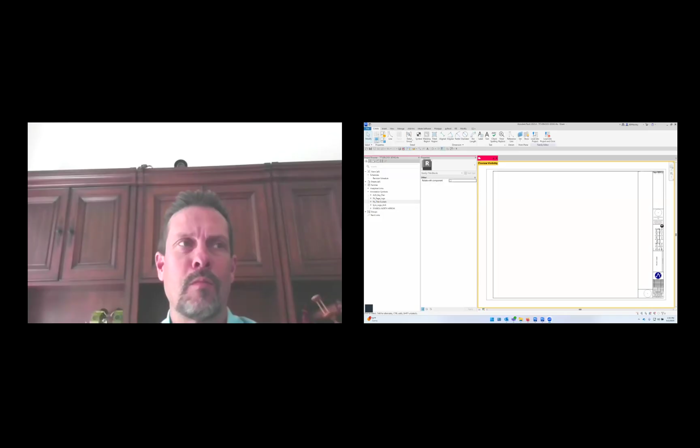Oh, can't see the layout, seeing two Brians. What? See, I was playing with the layout earlier. So for those of you watching this recording, just fast forward for a little bit. There's a new button in here called layout. Was it before I did? Oh, it was before I started it though. Did I screw it up? Now we're seeing your screen and you about the same size, but you're also at the top. I'm also the top. Dang it. Okay, hold on. There was a button called layout. I'm like, what does this do? And I obviously screwed it all up.

That's my view. Attendees standard. Is that better, everyone? Still big you and two little you. Side by side speaker. How about this one? Maybe you have to stop sharing and reshare. Oh, that's a good thought. Have you tried turning it off and on again? Advanced sharing options. No, that's not what it was. Okay, I'll stop sharing. I'll just edit it out. I probably won't edit it out. Let's be serious. No, I want to stop share, not continue to share. It did keep you. Okay, now it's just you. Well, I don't have the layout anymore. The layout button went away when I started the broadcast.

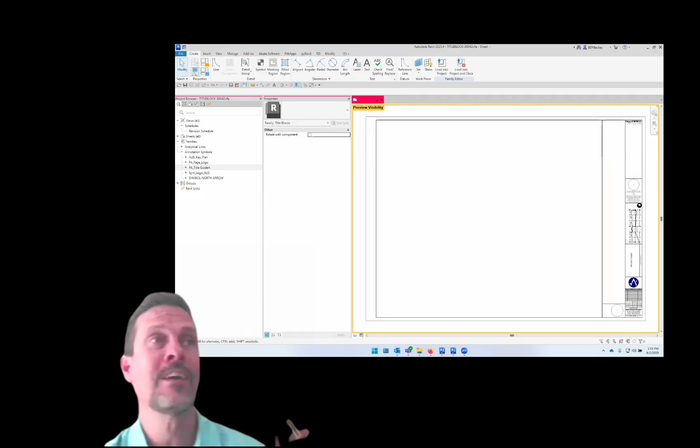Oh, found it. Sorry, the button moved. Content only. Is this better? Oh, there you go. Okay, so for those of you who ever get into your own Zoom webinar, do not ever hit the layout button. Now that I found the button, I could just be a floating head here or this one. Cool. I guess it's that one we wanted. So if you do find that button, switch it back to content only. So there we go.

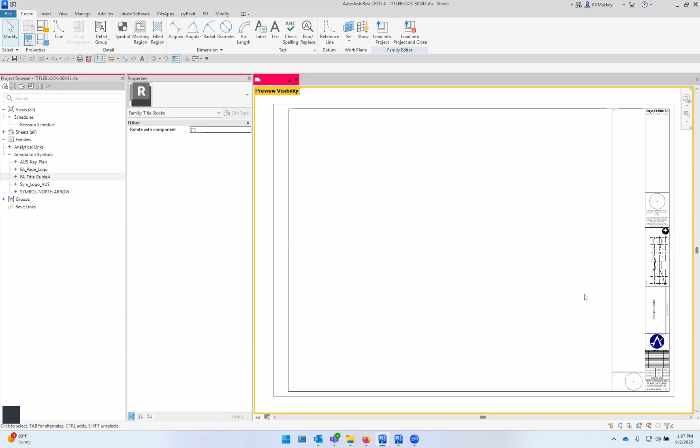And I believe one of the ways you guys do it at Parallax, Melissa, is similar to the way I do it here. For me, I open the title block, and in my title block family, I have a nested generic annotation family. So I don't care how accurate this is. I get some clients like, no, that is not an accurate depiction. This particular project is an airport. That doesn't show the planes and the terminals and all that stuff. If you want that, this might not be the way to go for you.

But for me, I nest in a generic annotation family. I have this set up in my template as well. So when I start a project, I have a generic annotation family within that project called the key plan. Within this key plan, I just draw some very basic shapes to match the building. I create an object style for all of those shapes, called like the building outline.

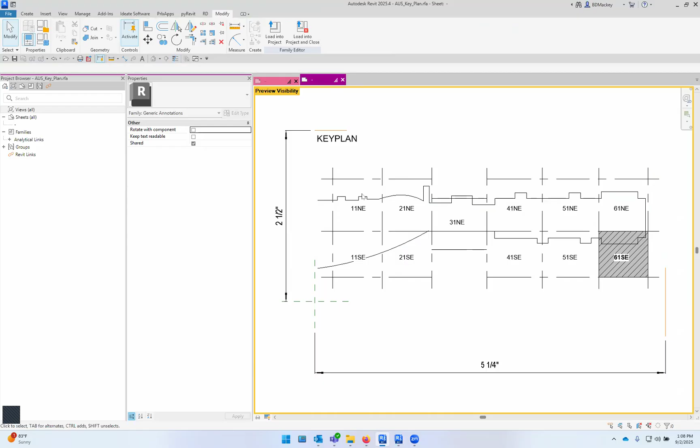Usually because most of my clients are very concerned about having different line weights on everything. If you don't care because it's a key plan, you can not worry about that. But once I draw the building outline, I take all of those lines and put a visibility parameter to the building footprint. I do the same thing for the match lines. I draw a match line and put a visibility parameter for all of the match lines.

Then what I do is put filled regions, which I will have one over here. Each filled region gets a visibility property for each one of those areas. So if I come down here and turn off my preview visibility, you're going to see I've got filled regions in every single one of these.

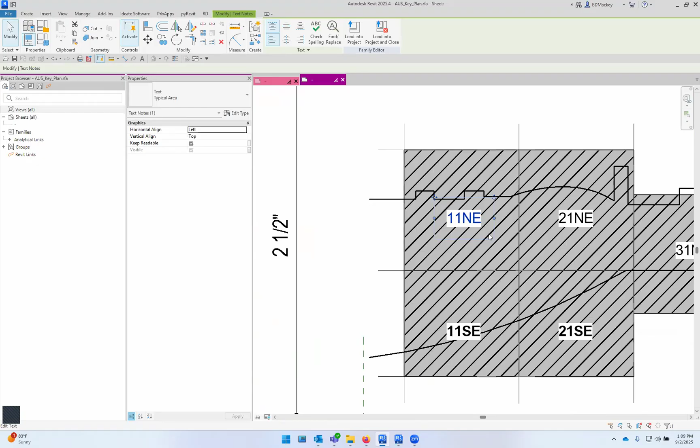The one thing this has that I've never done before, this particular client asked for it, they actually have one piece of text and then another piece of text in bold right there. The reason is when they turn on the preview visibility, they want the word of the key plan area to be in bold and the other ones not to be in bold. So I have the one piece of text, and then the other piece of text right over the top of it that's in bold.

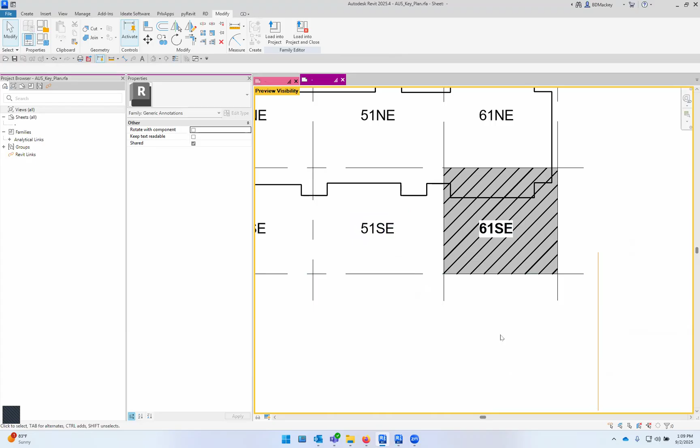So if I go into my family types, you can see I got the visibility for each one of the areas. And down here, I had another one just to turn off the bold text. So this turns off only the filled region, but when this is turned off and the match lines are turned off, the bold text goes away as well. So that's how I set this one up, so the text would toggle on and off.

Then, of course, inside of here, I create a type for each one of those key plans. So this one's called Area 11 Northeast. If I hit apply, we'll see that that one goes away, and we'll do 61 Northeast. Hit apply, you'll see that that one will now turn on.

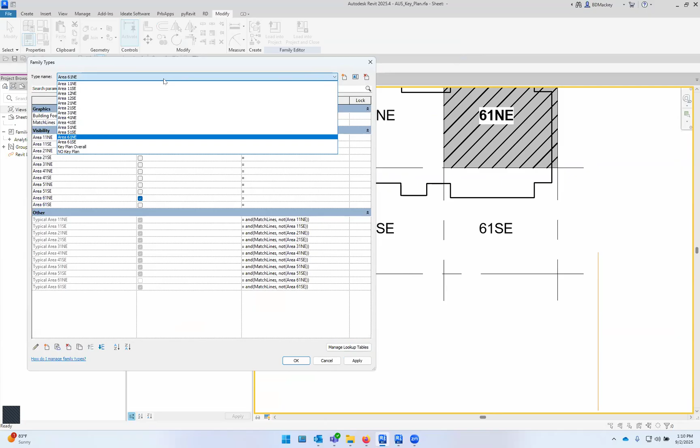So I create all those types. I also create a type called key plan overall, where all of the filled regions are just turned off, and I see the word key plan and all of the little pieces of text. The last one that I create, I call no key plan. So I hit the apply button, and all the things are toggled off.

And this is the reason why I do building footprint and match lines on a line: I like a type called no key plan. The reason for that is, when I get into my title blocks, I don't control this via the title block, right? If I go into my title block family, you're not going to see those 500 different toggles mapped through here. What you're going to see is a family type parameter, right?

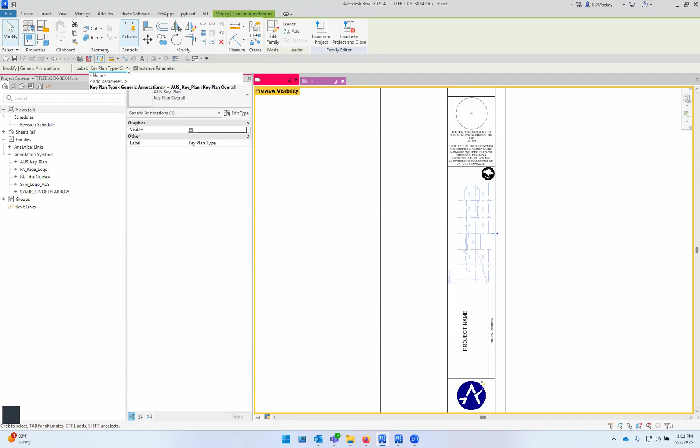So I selected the generic annotation symbol after I located it. I came up here and said I want to add a parameter, and I created what Revit determines as a family type parameter for that nested type family. The big thing is, back here in the original family, I have set it shared. And this is the reason why I like doing this.

So with this being shared, when I load this into the project, I'm going to create a new project, because opening the one that's there is probably going to take way too long. But when I load this title block into that project, it's also going to load this key plan family. So I'm going to load this into my blank project, put the title block in here, and have this beautiful new title block.

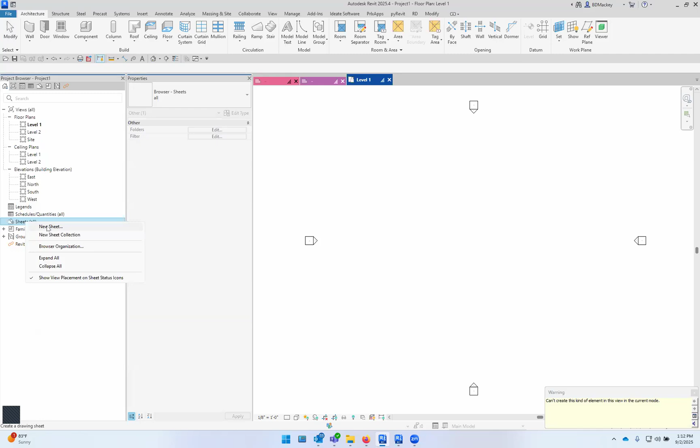If I create a new sheet, I now have the title block that we wanted to be using here. We'll just say the no guides, right? And now with the title block, I can choose which key plan I want to be seeing. Which one am I looking for? So it's not toggling and having 500 different title blocks, one for each key plan. It's literally just a nested generic annotation family for this particular thing.

Where it's really nice on this particular project is there are 5 different buildings we're doing. There's an area over here, and there's a whole new building way over here on the actual job site. So what's nice is, in our families, under our generic annotations, it's just going to be down here. What do I call this? Usually I call it sym. I don't remember what I called it in this project.

They had a requirement. I was going to say it starts with an S, but maybe not. Maybe it starts with a T. We just tab selected to figure it out. AUS key plan. Oh, that's right, it's for the actual airport, right? So that family is there.

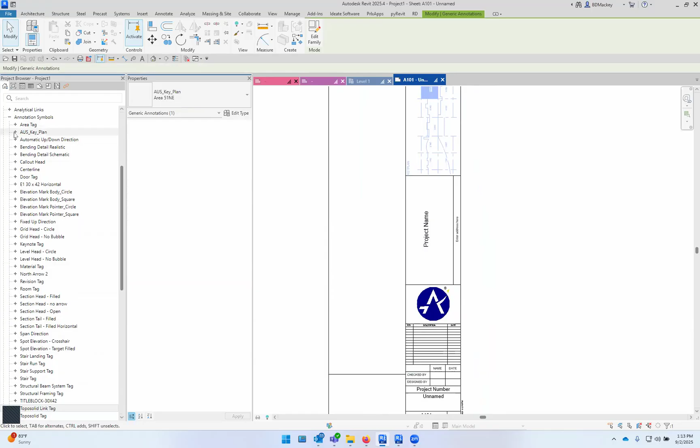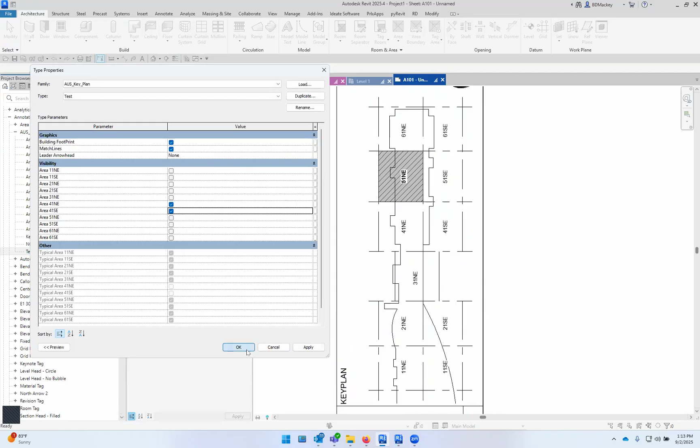So if for some reason I need to come in here, and we're doing one view that's going to have 41 Northeast and Southeast, I need a new type. I don't have to edit the title block or go through there and do anything. All I have to do is, under the key plan, duplicate this and call it my test. Then in that test key plan, I can just toggle on the multiple areas I want to see. The title block wasn't edited in any way, shape, or form, and I now have my new test key plan.

So in this building's case, the other project that's using a different key plan because it's a different building, all they have to do is come up here, right click, reload, browse to their key plan, and it's going to be a part of it. So if I come down here to mine, I'm going to go into my annotations, not my adaptive components, and into title blocks. I probably have a TB key plan in here. Nope, it's probably under symbols.

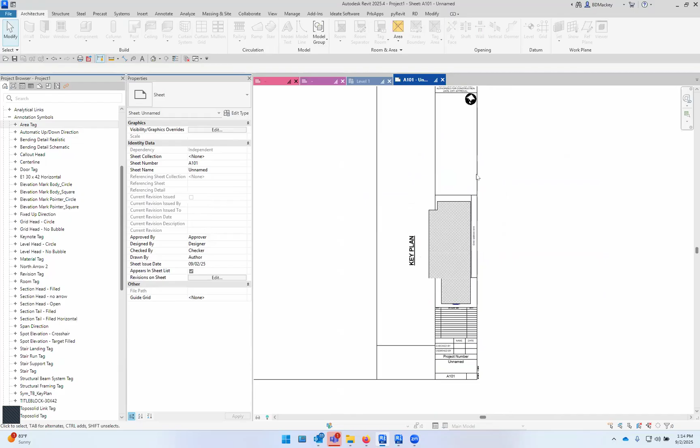It'd be nice if I actually knew my own content naming, right? So here is my key plan. So for the other building, all I have to do is reload it. And now there's my key plan. Obviously, it had a different insertion point. You would make sure it's the same. But now when I grab this title block family, I have my key plans that I had inside of here.

So I can go grab the area D, the area A, the area B. All right, so this is what's really cool. And again, when you do your project and you save your new project out, you can go create a key plan for that particular project. You never have to edit the title block. All you have to do is go reload that family to be the new one. And hopefully they have the same insertion point, unlike these two.

Okay, I think I need to do not disturb. Okay. You need to hide your Teams. Just do not disturb. Because even though it says I'm in a meeting and it shouldn't be showing that stuff, Teams doesn't understand. So if you guys didn't know that, if you right click on Teams, you can say do not disturb. I actually moved both of these to the top because those are the two I use most often. You can pin those. So see, not only are we teaching you how to screw up Zoom, we're teaching you how to unscrew up Teams.

Perfect. Well, back to your key plan, we have two questions. The second one is just a confirmation, making sure that you were talking about sharing the family. And what does it say? So it says, confirming I heard correctly, you have to have the shared box checked for a nested family. No, you don't have to have shared checked for all of those different scenarios. The only reason you have to have shared checked is if you want that to get loaded into the project, and then you can manipulate the one in the project without having to edit the title block.

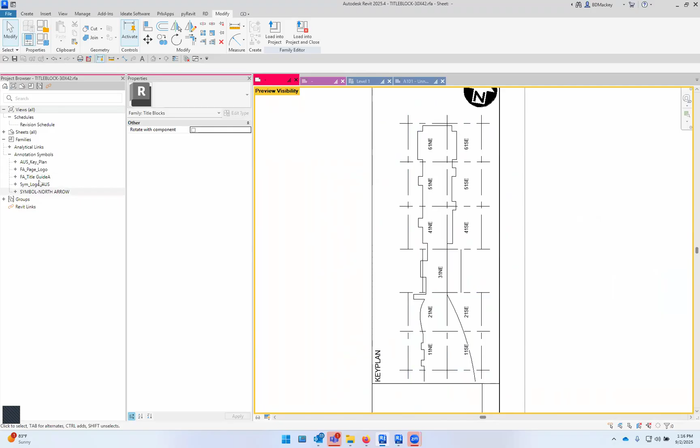Even though that's part of the title block, I can tab select this. I can see the properties of this. I just can't really move it, do anything independent. If it's also a regular type family, I could choose to tag that independently or schedule that independently. So if I really wanted to go do a generic annotation, what are those called? Note blocks, I think they're called in Revit. If I did a note block schedule, then I could actually see I have a key plan schedule, right? So I have this key plan family loaded inside of here.

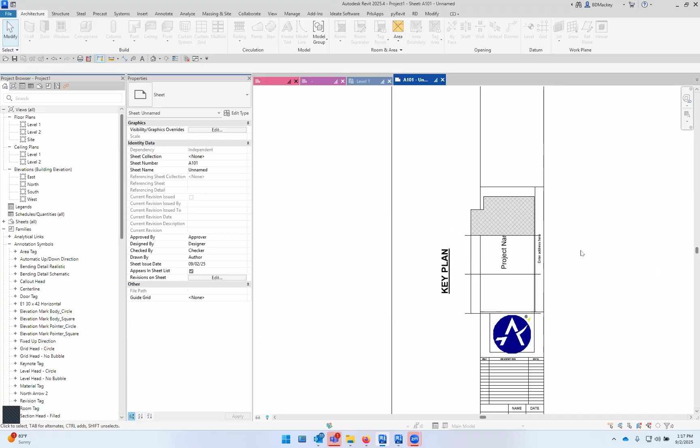So that's what the shared checkbox gives you. It gives you the capability for scheduling, for tagging, and for manipulating it without having to go into the nest. So that's what the little shared checkbox gives you. So hopefully that answers that question.

And I saw Simon had the comment of he uses area plans to generate his key plans. And that's fine. If you wanted to use a real view, you absolutely can. The only downside is if I need to put that key plan on 300 sheets, then I'm duplicating with dependent that view to put it on multiple sheets. I use this on almost all of my projects, but a lot of my projects, people are like, cool, this is the same area, but I've got level 1 through 10. So that'd be duplicating it 10 times.

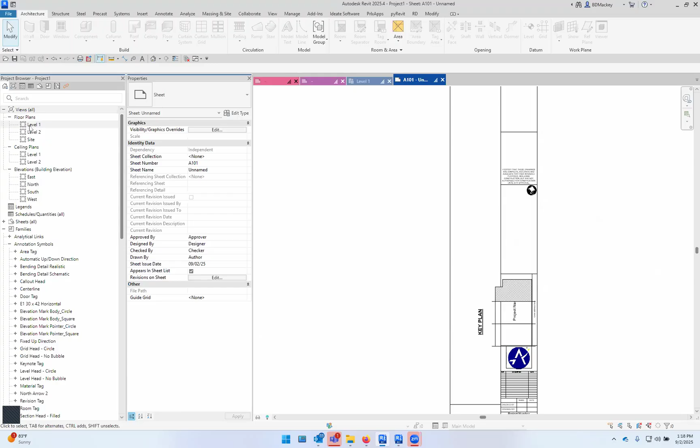Oh, I also got to do this on the reflected ceiling plan. So there's another 10 things. Oh, I also have finish plans and blah, blah, blah. So if you start doing this, I had one client do that. I literally got underneath the view they were doing, and there was like 350 dependent views of that one floor plan because they needed to drag it and drop it and put it on each sheet.

Also, prior to Revit 26, without having an add-in utility, there's no way to say you're actually getting that into the right location without building something into that view like a reference plane so you could move it based upon that reference plane. So I'm not saying the way I said to do it was the perfect way. I like the simplicity, and I'm going to undo this because it's driving me crazy. That's not in the right location. I just like the simplicity of doing it this way.

I also think too many people think the key plans need to be massively detailed like that. No one is looking at this billionth scale view of your building to get data from it. This is just representing to people, hey, we're roughly in the vicinity of this area. So I know some clients are like, no, no, no, I want to see the doors, the grids. You want to see all of that stuff. This is not the way to do it.

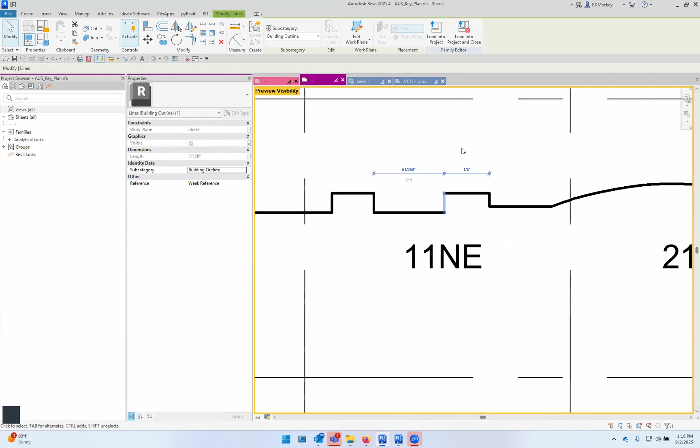Because again, if I go back to that family, you're in a generic annotation family, right? And the length of this line is 1/8 of an inch. I'm getting into problems where I might be less than a 32nd of an inch on certain portions of this building. I might just leave those parts out. Like this might have had some sort of angle in here. Don't care. If that line needs to be less than a 32nd, again, this is a key plan.

I think of the old hand drafting days where people drew a rectangle, called it the building, and then shaded over that rectangle. It didn't ever mimic anything to do with the building. So, like I said, if you want to do that, absolutely. But Simon, again, depending on the size of projects you're in, you might be duplicating that area plan 10 times, not a big deal. Over 300, I think I'd rather come up with a different way.

And I've also had clients who are like, oh, well, we like to do them as legends. So they go back in and do it as a legend. And I'm kind of like, well, a legend is very similar to a generic annotation. It's a scalable object anyway. So if you're going to spend all that work in a legend, then you've got to toggle visibilities on and off, so you've got to have a legend for each one of the different areas. To me, a little generic annotation family is more easily controllable because with a legend, you can't add parameters to the filled region, so you have a different legend for each one of those. That's what I got.

You guys do something similar, correct, Melissa? Or have you changed your game since a couple years ago? Yeah. No, we have a generic annotation nested into the title block, and then we have an app, so you can basically just hit go, and it goes through and reads the name of the sheet, finds the building and the area, and then makes sure that the key plan is set to the correct one.

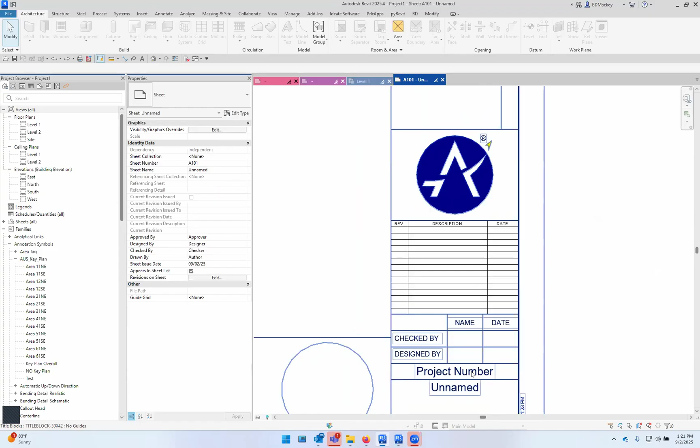Yeah, and I have a client who's using Dynamo to do the same thing. So the sheet name will say area 51 Northeast or whatever, and then it automatically says, hey, take the name of the sheet and match this property for that title block to that area 51 Northeast or whatever it is. So yes, they have a Dynamo script that will go through and do that as well. I don't think anybody in the office knows they have that script, so I'm sure everybody's manually doing it. That's actually fair.

We still only have one question. We have a follow-up comment to this, but then we only have one question. So I want to make sure you guys are still typing some questions in there as we answer the follow-up. Yes. So the follow-up is about filled regions. It says, I know they made some changes with the filled regions in families in 25, maybe.

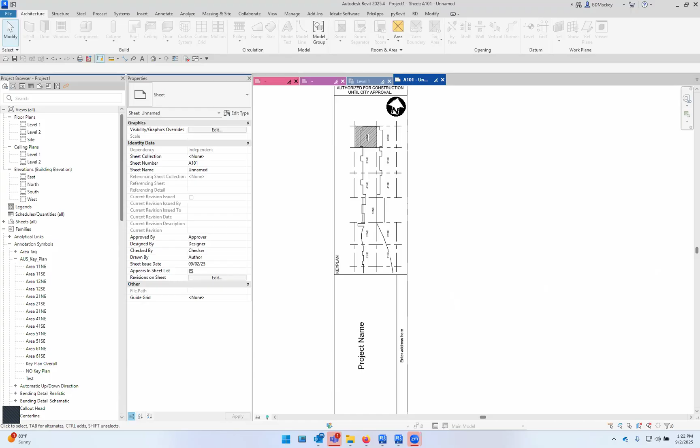We had the issue before with key plans that the lines didn't go over the filled regions, so the area boundary line. So their solution was to offset the filled region from that line so that you could see the line. Is that resolved for this particular case of lines and filled regions? Oh, it looks like maybe it is from what you're doing.

Yes and no. It always has been a display order issue, and this drives me crazy in generic annotation families. And I forget what it is, and it's really stupid because generic annotation families are different than detail components, and we don't get the display order bring to front, move to back that we get with detail components in a 3D family.

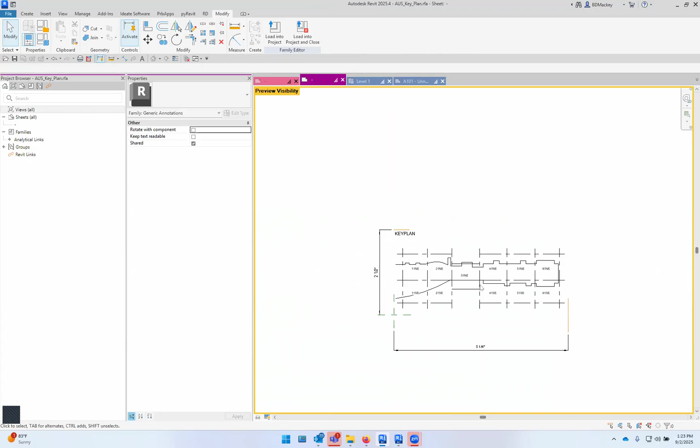Oftentimes I'll go through and do this and load it into a project and I'm like, oh great, this halftone line is over the top of that line. So I'm going to go through and change this to be one of the areas, right? And I've had clients come in and be like, oh yeah, so then technically if I changed the object style for match lines, it might be bouncing around.

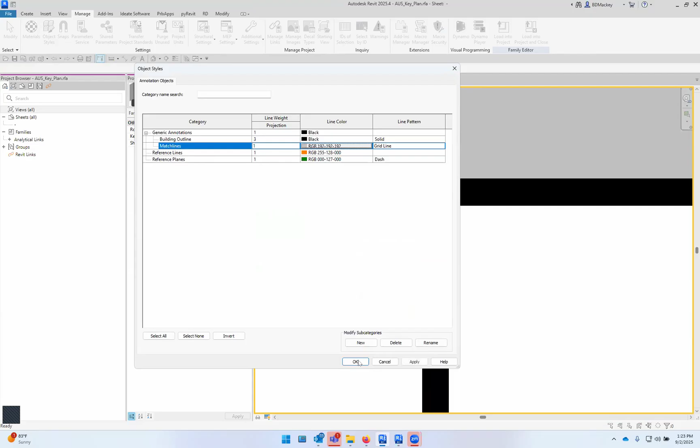And it's really stupid because if I came in here and I'm just gonna make this gray. If I did this, and I've had this happen before, now the gray line is on top of the black line. So now you get this black dash line here. Oftentimes that's how it displays in the family. You load it into the project, it doesn't display that way. And you're like, what the heck?

So you take those lines and I just do select all instances in this view. I cut them to the clipboard. I then do paste aligned to same place. It remembers the visibility and everything else that was associated to those. Then I load that back into the project, like, nope, that's not what the problem was. So then I select all instances of the filled regions, cut to the clipboard, paste.

So it's playing with that display order because in the Revit world, it's whatever was drawn either first or last, not sure, because it's different for different family types. And I start going through and doing that.

Yeah, thank you, Michael. I knew I talked about this before. Michael just said in the chat that I have a whole paper on this. I'll have to see if I can find that paper about display order in the families because it drove me crazy. And I swear over the years it's even changed sometimes. I don't even claim to know. I just know there is an issue.

It'll be the same thing if this text had a masking region. I've had the same thing where, why isn't this masking? I can see the text through the filled region. So again, it's a lot of select all instances, copy or cut, paste, and you've got to play cutting and pasting these things to get the right display order. In this simple family with no constraints, it works well. If things had constraints, you've got to reconstrain those, and that's where it becomes a massive pain.

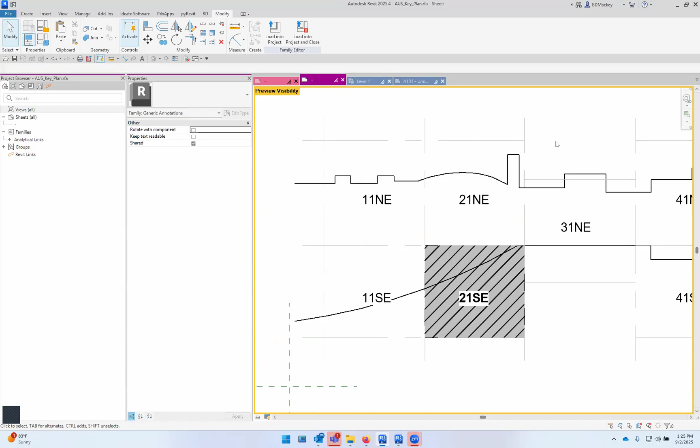But no, I don't know, Caitlin, if anything has changed in these versions, or I just keep getting lucky, or I just keep getting lazy and say, screw it, I'm going to make them all the same line weight, then I don't have to worry about it. Very well could be that too.

And I think there's still an issue, as you had said, that if I grab that filled region, if these were invisible lines, I have the problem with the invisible lines almost always covering over the top of them. Doesn't look like it's happening right now, but let's throw this into the title block and see. Let me change this to be one of the areas. So it doesn't look like the invisible line is going over the top.

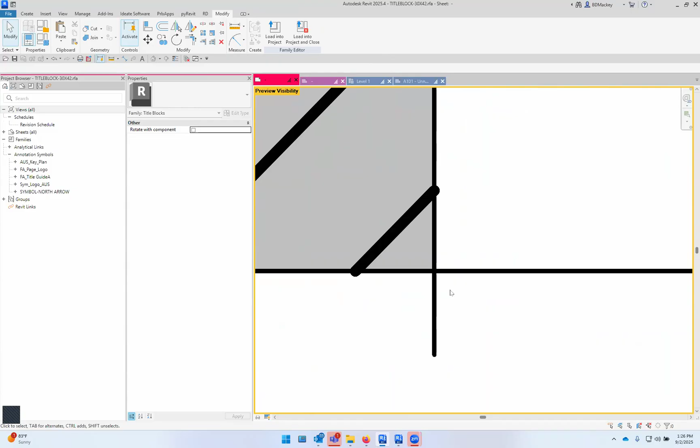Yeah, and Michael's saying, yeah, this did change a while back, because I had families that were working, and all of a sudden during one upgrade they started changing. It's like, oh, so well. Yeah, that's what my topic was. It looks like everybody's... I don't think there's anything else on there.

Okay. All right, close some things down before I break them. Boy, Melissa's looking for the next question.

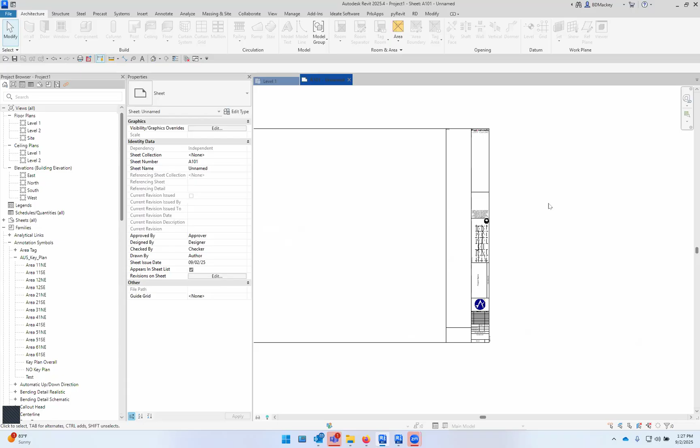Well, maybe we should go with Caitlin's, since it's still family. So she's asking if there is some sort of secret with reference planes and dimensioning that would be good for a novice to know about. Oh, I think it's funny she asks this question, because I'm actually going to discuss this at Autodesk University, and I was just literally getting into this with one of the papers I have.

In particular, for most families, it probably isn't that big of a deal. But as you start getting into more and more complex families, it absolutely does matter. I have always had a type A personality, and I've always done a lot of things a specific way just because my brain tells me it should be done that way, for no other reason than that it makes me happy. But what I have found over the years is that my particular type A personality has made my families very stable.

So one of the things that I start talking about when we get into this is if I were to come in here and just be like, cool, I'm going to start drawing some reference planes, right? So I'm going to draw a reference plane over here. I'm going to draw a reference plane over here. And then we're going to be sitting here thinking about how this is being controlled, right? So this is my insertion point. So I'm going to say, cool, I'm going to keep this as my insertion point.

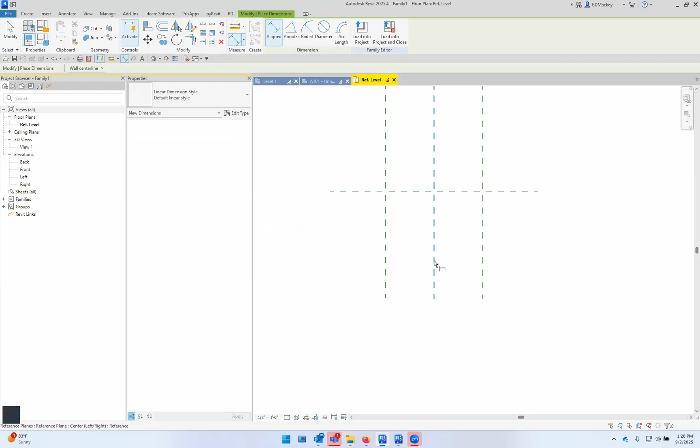So for me, when I go to start dimensioning and drawing these reference planes, these dimensions for the parameters, what I start to do first is I'm going to come up here like, cool, I want to do an aligned dimension. And I know I want this to be centered. Since this is the controlling reference plane, I will click on that first, right? I'm going to do an equal dimension. It's then going to start moving these dimensions.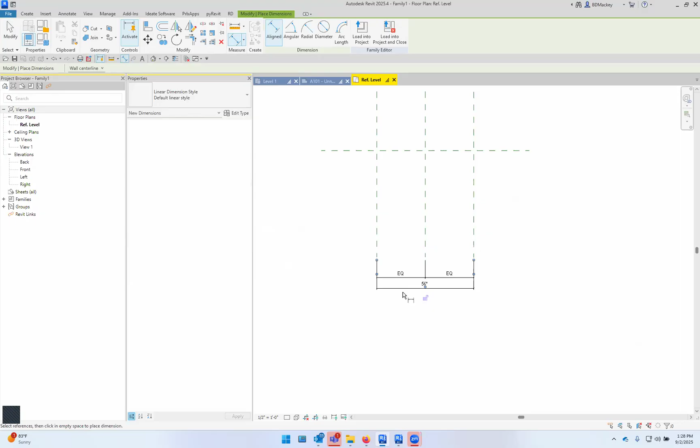And I know out of habit, I always draw the right one first. So I dimension to the right one first. Does that matter? I don't think so. It's just what my brain has done. But since I dimensioned that right one first, and I'm now going to want to come over and do an overall dimension, I'll actually click the right reference plane to the left. I don't ever go inverse. If I would have clicked the left one first and then the right one, then when I did this dimension, I would go from left to right.

Probably doesn't matter, but as I've gotten into advanced families that break, I've literally just deleted all the dimensions, put them in a way that made sense to me, and the family starts working again, right? Then if we were doing another reference plane inside of this reference plane that was going to be controlling something, I again don't click on this reference plane first to this one, because the length parameter is going to be moving this one, and then this one wants to go along for the ride.

So again, thinking kind of in that same display order scenario we were talking about with the graphics, there's also a creation order, right? So for me, then I would do this one and come up and say, cool, now I'm going to have a parameter here. Because if this moves, I want this to control that. And that's kind of the big thing for me that I want to go through and start working at.

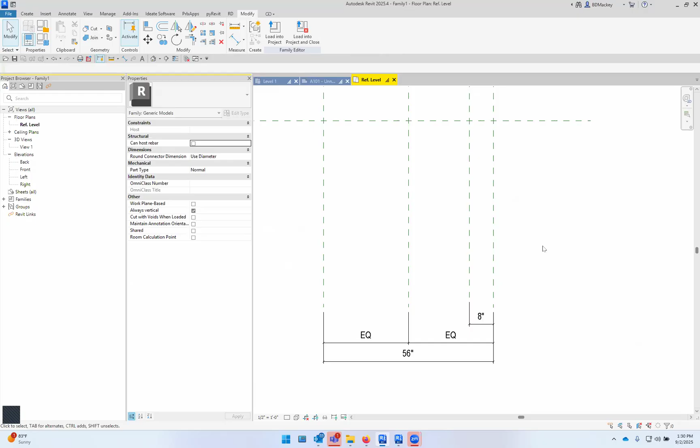Everything in Revit's got a positive and a negative face. There's a display order. There's just an order of things in Revit that I have just done over the years, and I have fewer families break than most people. And I've actually taken families from my clients like, this just is broken. I'm like, this should not be breaking. It all makes sense. Like I said, delete dimensions, re-put them down, re-put the exact same parameters down, and the family starts working.

So that's kind of the big thing for me when you are talking about the secrets of reference planes and dimensions, etc. Kind of getting into those things when you get into there. Yeah, and then as Rick said, dimension everything to a reference plane, never to an extrusion or anything else.

Okay. I probably actually still have that one pulled up, Michael. Michael's like, oh, one of the best sessions ever. Like you can see, I even pulled this up to talk about.

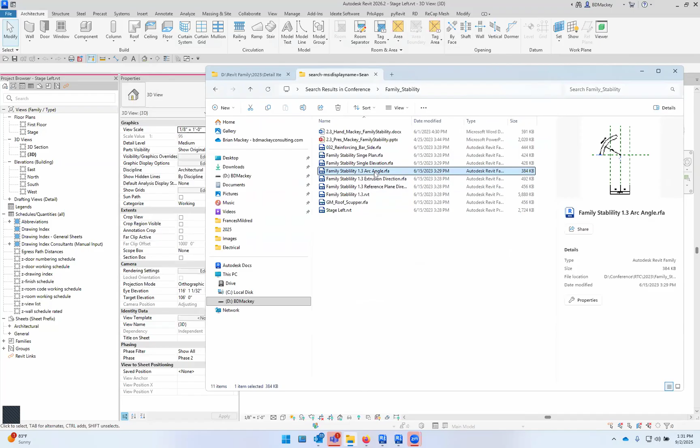But when I start talking about it, it was my family stability class. Let me see if I actually pulled it into my new... Yeah, probably didn't. RTC. Yeah, I'm not gonna find it there. Let me just go search this under here. Conferences, stability. This one. I've just got to get out of this first, or I can drag and drop. That's not the one I want. I want the one with the wall in it. Where is it? That one. You've lost your family. No, just got to figure out which one it is. I call them all the same thing. This is probably for the lab.

So this is one thing that I always love to talk about. This was just very simple cubes I created. There's no parameters to it. There's nothing. But when I created these cubes, I drew all the sketch lines within the cubes in a given direction. And what you'll start to see is if I start to place this face-based object on here, how it's rotating just because, honest truth, of the directionality I drew the sketch lines.

I investigated this because I created a countertop family and I kept putting my face-based sink faucets, my sinks, everything on it. And I kept having to hit the space bar twice to get them the other direction. I created another family, and it's like, man, I have to constantly hit the space bar one time to change the direction of this. So I spent more time than I should have to figure this out.

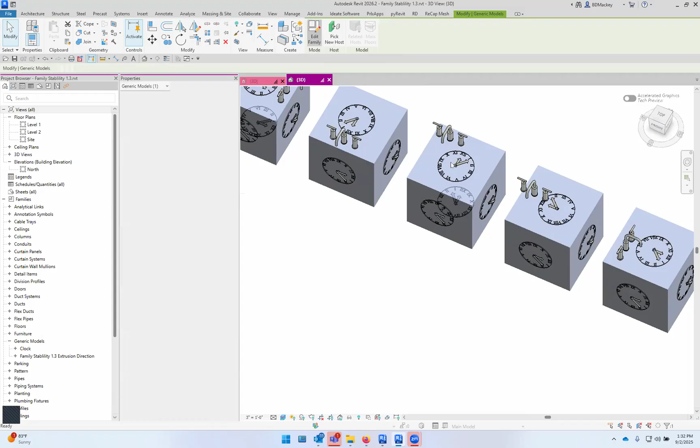If I literally go to the floor plan of this family, when I started drawing my sketch lines, I did a rectangle and I went from the top right corner to the bottom left, top left to the bottom right. I drew sketch lines all left and all up, all right, all up, in an all clockwise direction and all counterclockwise direction, etc. And I did that to start seeing what's actually going on when you put this family into a project. That's what I found out.

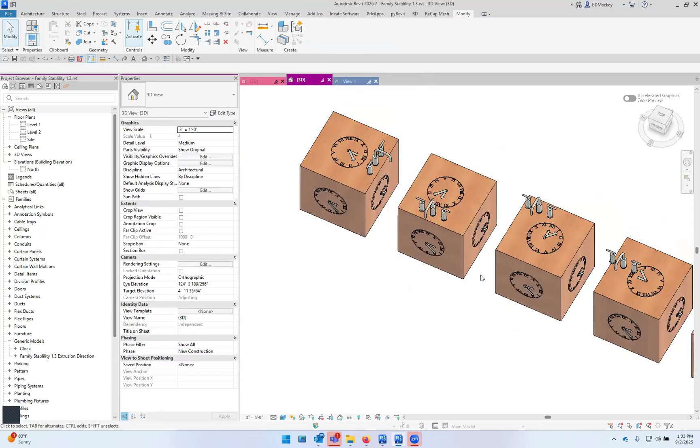So it's hilarious that the vertical faces from the work plane you're set to doesn't care. All my clocks are pointing the right direction. When you put those clocks on the parallel face, they all start rotating depending on the direction the sketch lines were moving.

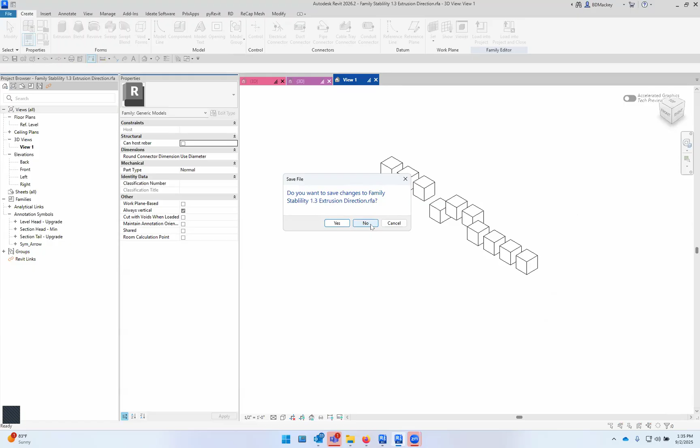So within a project, if you have a generic annotation family loaded, you can actually, that's not what I thought I was. Oh, because I switched versions. We're back to 25. So if you are in a project and you have generic annotation families loaded into the project, you can go up to your views, come down here to schedules, and create what's called a note block. A note block is going to grab any generic annotation family and allow you to schedule that annotation family.

It will also allow you, and this is the part that blows me away about Revit, to schedule any of the parameters, even if they're not a shared parameter. I should not be able to schedule any of this stuff in any normal family except generic annotations. So if I wanted to grab all of these, let me move it over. I also wanted to grab the type, which is going to be the name. I probably should have moved that first. By the way, don't hit up 30,000 times, select everything else and hit down once.

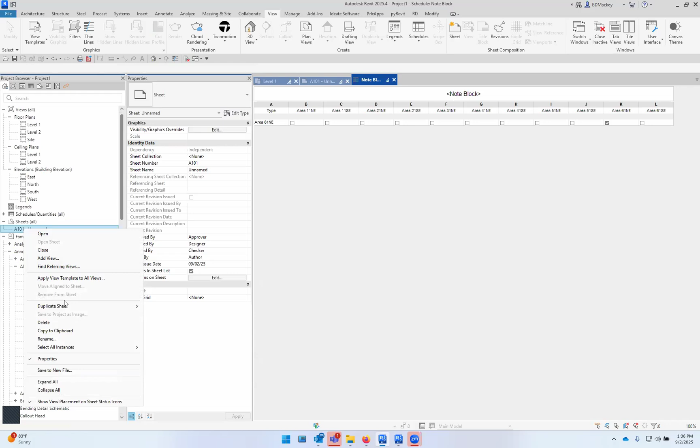So now if I say okay to this, it's going to start showing you all of those parameters and which families I'm using, right? So if I come down here to my sheet and I duplicate a sheet, and I grab this one and change the key plan to be something else, it's going to pull that up now in my note block. So that's what a generic annotation note block or schedule is going to do.

So one thing about that is that's a generic annotation family. Rick asked, do you think architects use this more than engineers? I don't think there is a more or less. Most of my architects actually use note blocks where, in my opinion, they should be using the Revit keynoting. I personally don't use them for keyed notations. I still use keynotes, though now I might change my thought.

But in the old days, I only ever used keynoting because I could check the filter per sheet, and I would only schedule the ones visible on that sheet. So I might have note 1, 6, 12, and 42, the only ones displayed on the sheet. So I personally always loved Revit keynoting for my keyed notations. I'm air quoting all of this because keynotes and notations get confusing. Keynotes versus what I call keyed notations, a different terminology. So that's how I did it.

Most of my clients have switched over to using the Revit keynoting tools as their keyed notations, because they're type properties, but we could filter it since they added filter by sheet for any schedule 3 years ago. So I can go to sorting and grouping, and, oh, you can't for a note block. So never mind, I'm not going to use note blocks for this, because we don't have filter per sheet for note blocks. I like keynoting for that reason because then I can go notes 1 through 50.

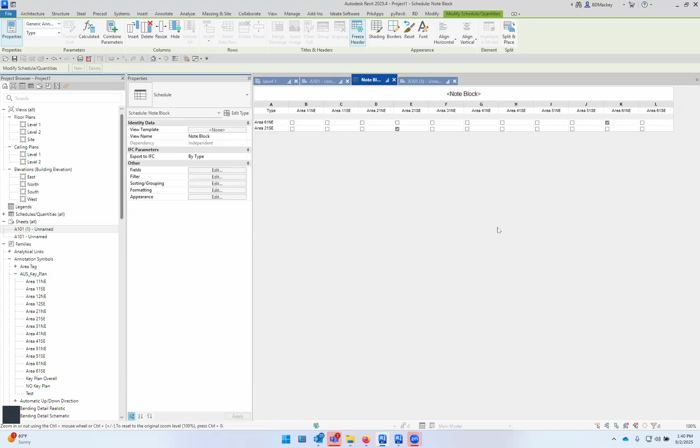Yeah, and that's the other thing Sarah said. With keynotes, you can actually assign it to an object. Honest truth though, when I'm doing keyed notations using keynoting, it's usually going to be based off of user defined. Because oftentimes, like in an elevation, I want to know, oh, exterior finish to remain, blah blah blah, and it's a novel, and I don't want to associate that keynote to this wall. It's just a note I'm calling out.

But yes, keynotes do have the advantage of when I go to place a keynote, I have the element, which is going to pull out the element keynote, the user defined keynote, which will just let me pick anything from the list, or I can keynote a material. Yeah, aka sheet notes. That's where the user defined starts coming in.

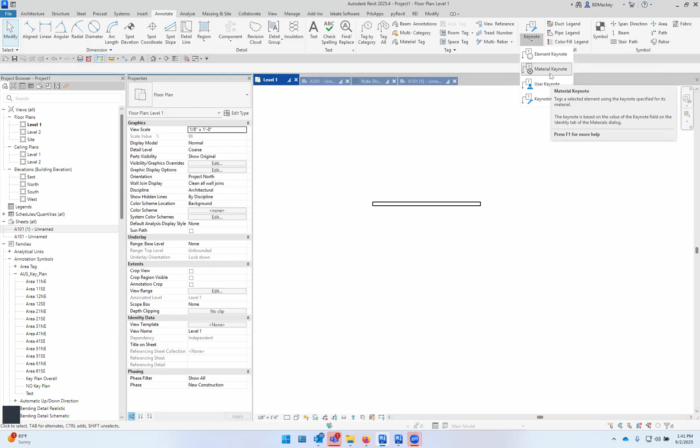And again, there's a couple add-in utilities, which is really cool because it'll actually tell you how many user defines you have. I use Revolution Design's Keynote Manager. It's a great tool to show you if it's being used, how many are in there. I believe VisiSpec has something similar too. So there's a lot of add-in utilities that will let you know how many user-defined keynotes we have. So it's kind of fun. So long-winded question, long-winded answer to your question, Rick.

Yeah, I think we have a combo, because usually we'll use the Keynote tool for most of the noting, but then a lot of it is like demo plans where it's like remove this or reuse this, and they just want it to say 1, 2, 3. We'll use note blocks for that. Like I said, some clients it's all over the place. So Brooke's original question said who uses it more. It's just everywhere. Depends on the day. I haven't seen too many MEP people use either. But then again, I'm not diving into MEP models that often.

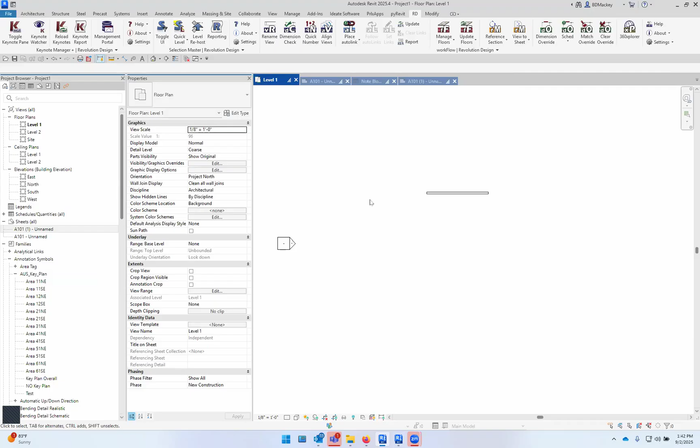So what's our next question? Okay, so that was done. Oh, yes, Michael was pointing out the disadvantages of using keynotes. If a floor changes extents, the keynote will run off. Although if you pin it now, it wouldn't move, would it? No, I was just gonna say that. So I think this is something that not everybody knows, and I do this quite often.

I'm gonna open my little detail file. One thing about any tag in Revit, and this would be true for Keynote tags, I'm going to show you this with a detail tag. One of the biggest things with tags in Revit that I've always hated is you're like, oh, cool, I've got this all lined up, right? And I decide that I don't want these two pieces of rebar here. I want them over here. Graphically, I just want to move them over. What you're seeing happen is both of those tags are moving, right? But if you...

Take your tags, now I just nudge like 30 times. Let me go and nudge all my... I know, it's nudges. Bad. If you take these tags and you pin them, now if you take that element and move it, the tag stays. This is true of any tag.

So material tags, any of those tags, yes, if you like a floor tag or a ceiling tag or something that's a large object, you can pin that tag where you want it to be. And then if that element starts to change, it will stay where it is, just the leader starts to adjust. Same thing if it wasn't a free end like this.

Where's the property for free end? Here it is. I thought it was up here. Wow. I moved it just down into here. So if I come down here and said, no, no, no, that's going to be an attached end and it's unpinned, again, same thing. If this wall starts to move, then that tag moves as well. But if I pin it first, then it does not move. So it does it regardless if it's free end or attached end. If you pin the tags, they will stay.

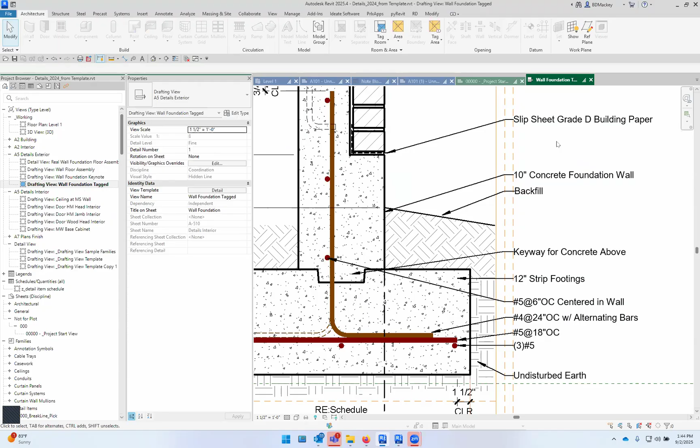And that was only a few releases ago, right, that they added pinning? Oh, it was quite a few releases ago, because it changed the way I do all my details. Because I've always loved this. For as long as you've known, I've been teaching intelligent detailing for years, like over a decade. I'd be like, oh, cool. I'm gonna go switch this to a 2x4. Look how great all my stuff is.

This updates. Oh, but I'm gonna go ahead and then just move that over and this over. So I've got to move it. I'm like, yeah, so this might have to happen, whatever. And then that note's no longer lined up. People are like, yeah, but now my notes look like shit. I'm like, yeah, sorry, got to move it. When they added this, it was like total game changer. Pin all those tags and they'll stay lined up.

Yeah. Of course, if you're in Revit 26, you can now... in Revit 26, I don't think it was in 25, was it? Filter, I only want the tags. No, so in 25, you can actually say, no, no, no, those are all screwed up. I probably have to go and pin them first. I wanted those all to be right justified based off of whatever. I don't know what it justified off of, probably the extent of the tag or something. But yeah, you do have the alignments now in Revit 25. Oh, nice.

I'm gonna go just pull one over and see if I can actually get them all to line up to the left or if they're just really, really screwed. Filter. Say let's go left justify these. Yeah. So that is nice. They added that. I think it was 25. Could have been 24.1. I'm in 25.4. I suppose I could look at...

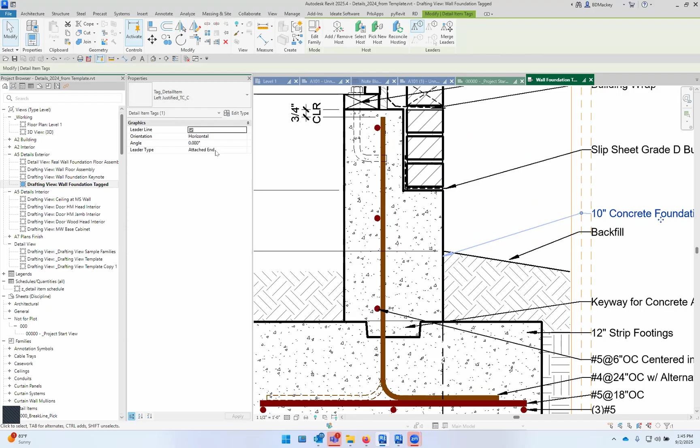Oh yeah, but the attached end, free end is a big deal. Because if you have one that's the attached end, it means it's always going to find the center of that element. And if you even move it like above, it's going to go to the center of the top part of it. Or if you move it around, whatever, it's going to move and stay to that edge. If it's set up as free end and you change it from attached end to free end, that arrowhead will stay where it is regardless of where you move it.

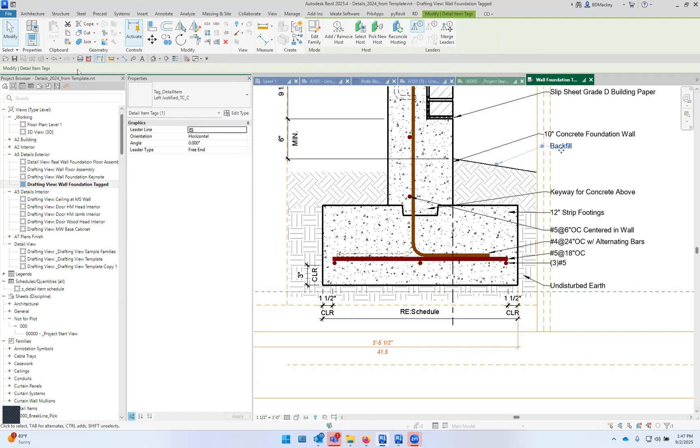Yeah, prior to Revit 25, I believe free end, attached end used to be right here in the ribbon. They're trying to remove everything from the ribbon up to here, so I don't get why I'm not even seeing it up here in the contextual ribbon. Because it used to be down in the options bar, but not seeing that.

Because everything's consistent except when it's not.

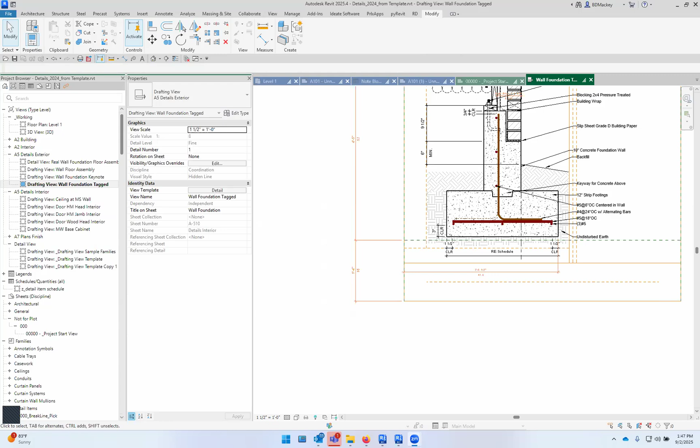Oh, we have a follow-up on if there is a way to get the leader landing to be consistent in length. So I'm assuming the little elbow bit. Yeah, I just had a client who changed their font, and I have all my tags loaded, and I'm like, cool, no big deal. But the font shifts down, and now all the arrows, all the leaders are doing this. Yeah, that's super annoying. So it's like grab the font, nudge it up a little bit. Nope, arrow didn't fix. Grab the font, nudge it down. Just keep nudging it up and down. It's like, oh my god.

But yeah, is there a way to get leaders to be consistent in length, not without an add-in utility? Once you do one leader, they will snap. So if I put this one over here, I can grab any of those and Revit will snap them together. But to just say, hey, I want to move all these, line them up, and get the leaders all consistent, I don't believe out of the box there's any way to do that.

Yeah, it sure seems like that should be a type property. Like I want a 1/4 inch or whatever. I have the Ideate tool, and the Ideate align tool will say, hey, align these and make the leaders align at 1/4 inch or something. So their add-in utility does that, but I don't believe you can do that out of the box.

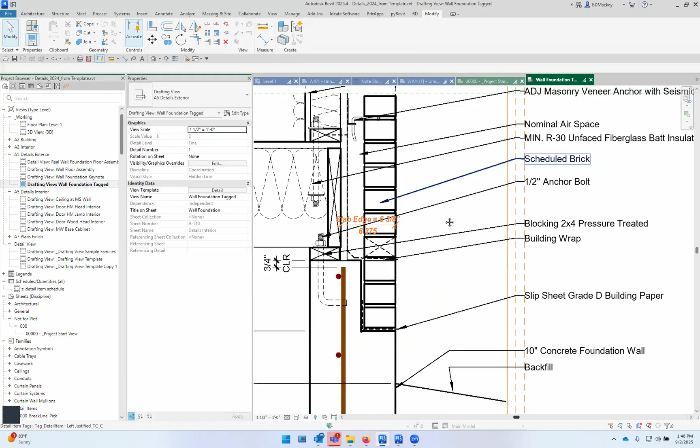The other thing too that I don't know if a lot of people know, and I've just got to find two things that are the same. I guess I'll tag two pieces of brick. One thing that you can do, and they added this in 24, is you can now have multiple leaders to the same object. So I can say add or remove host here. So I can say, hey, cool, I also wanted to tag, that's a repeating detail component, this brick, right? So now I can have two leaders.

That's probably the one I am tagging. Left host. No, I was tagging that one brick. So I should be able to say, cool, add or remove a host, grab this host down here. And now you can see it's got a different type property. But if it did have the same type property, it would come up saying, cool, that's what we're looking for. So that's a great one for me. I loved when they added that, being able to add multiple hosts.

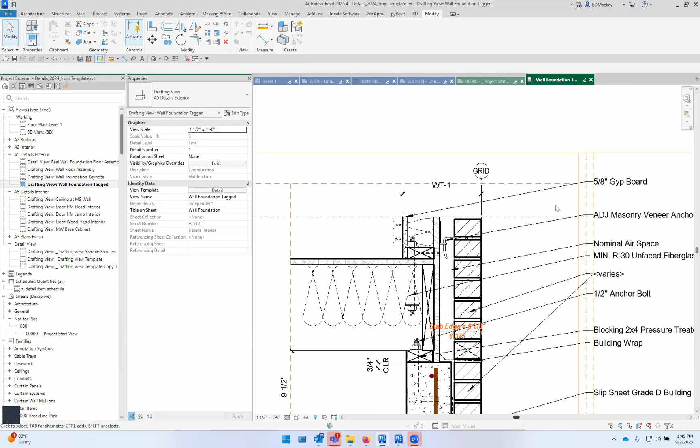Yeah, that was way better than trying to get two tags right on top of each other, with the text of one on top of the other. And then it was even worse because if you didn't pin it and somebody moved the one element, then the tags that were on top of each other now shifted and looked like you have a shadow. It's like, no. Yeah, drop shadow for all your details. Yeah.

Cool. Very Word 95. That's funny. All right, so what else we got?

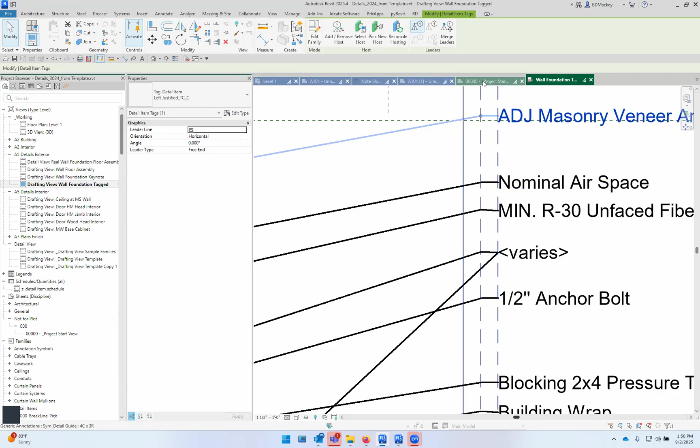Oh, I'm just looking at Bud saying there's invisible lines. Yeah, but the problem with the leader arrowhead, unless they've changed it, is even if I draw like a reference plane, I don't believe you can snap to it. So putting a reference line doesn't help. So my detail box theoretically has this little line here, and that's just for me to come in on the first one and say, cool, I'm close. And now all the other ones will snap to the one that's there, but it's not going to snap to a reference plane, a line, or anything. They just don't snap to my knowledge. They only snap to other arrowheads.

I think Bud is thinking of the invisible line in the actual keynote tag. Oh, yeah, so that it will stay centered, to keep it centered. Yeah, which is super fun because then your little move arrows end up somewhere clear down here. But at least it's centered, right?

So I'm very OCD that I actually have a property on it that can flex, because I don't want the line always to be 10 inches long. Oh yeah, actually we have a parameter to the invisible line. I'm trying to think if I have one inside of there. But the other thing that I will do when I do have those invisible lines, I will add the parameters for controlling the length.

But when you do draw those in there, make sure you're saying the line is also not visible, right? So if I come in here and I'm going to draw a line, it's going to be an invisible line. Two things I do. One, I make sure this invisible line is not a reference. I don't want somebody accidentally snapping to it. And then two, I turn off its visibility.

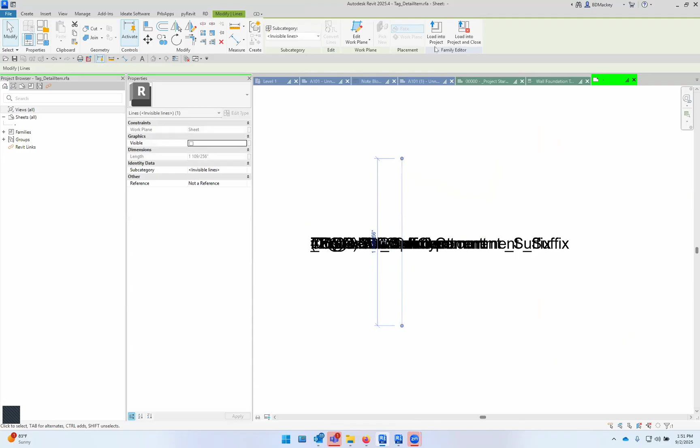So even though I'm trying to use this to get my arrow or whatever to stay centered, if I load this back into the project, if I don't do those two things, it just broke all my leader arrowheads. Ready? This one's now the bottom. Look how great that is. But I make it invisible so, A, you don't accidentally see it inside of here, but then I'll also go through and make it not a reference so you don't select it.

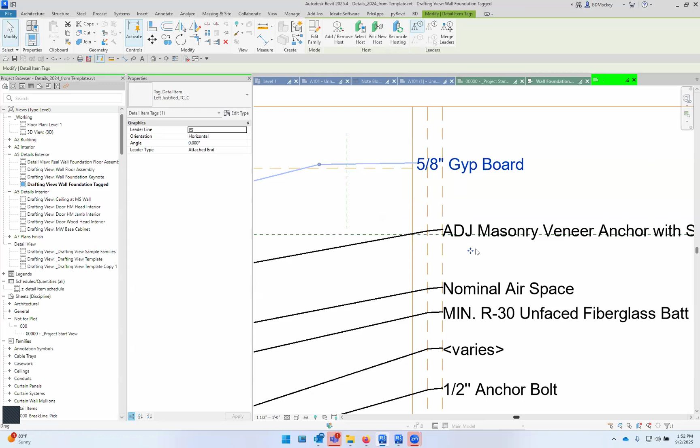Right. So right here, I'm doing this selection window up here. And if I get the selection window down here, even though my move grip is down here, move it out here just to make sure I'm saying this correctly. Right. Well, I guess it is still selecting it. But it didn't select it. And I also make it not visible, so you hover over it, you don't see the damn line. But I thought also it didn't select this. I guess I'm lying.

But yeah, so in those tags, usually I will go in and I will parameterize these and I will add a length to them. Right. So I would literally go from here to here to here, hit my little equal button to keep it there, and then I will dimension from here to here to here. FYI, I grabbed this just so I wouldn't have to tab 400 times. That's another little gem there. I don't want to have to do a dimension, tab, tab, tab, tab. There it is.

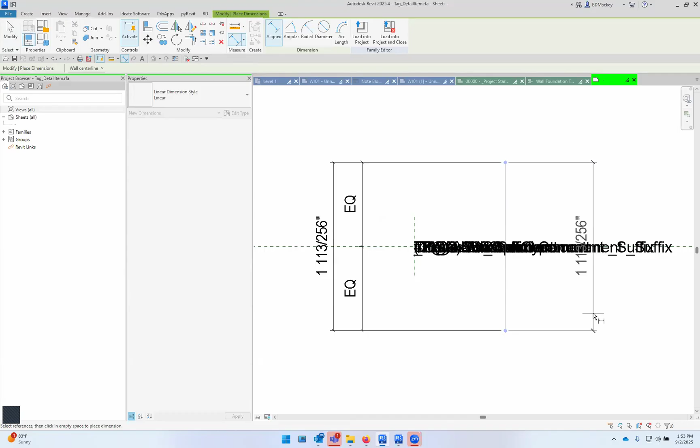If you get something parallel first and then remove that something, it'll stay where it was. That is a good point. It knows which way you're going. Yes, it knows which way you're going. You've set the direction. Right. Then tab that little thing up saying, cool, now it's there. Let me make the L 1 foot or whatever. And now when I load it in the project, it's there, it's parameterized.

And then if I get some tag where it's like, oh man, this one tag has the words going 15 lines long because somebody put in a damn novel, then I could duplicate the tag, change the L to be whatever I wanted, and it would keep it centered. I can't not parameterize things. Why? Well, because there might be that instance where you really want to keep that there. Ours is parameterized also, and I've made use of it multiple times in the last few weeks.

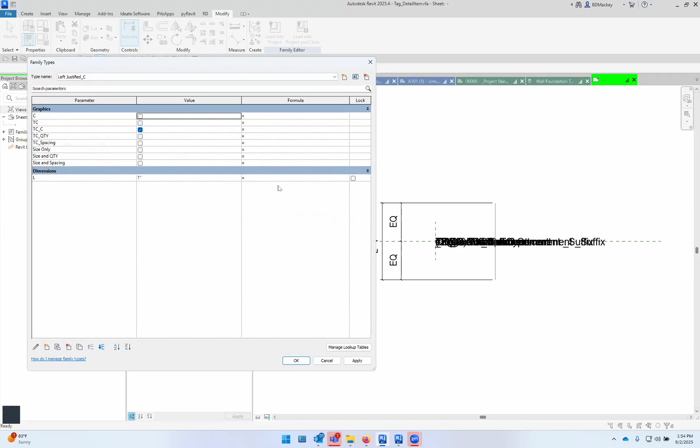The thing that gets me is that you have to have all the different lengths. Yes. Length one, length two, length three. I hate that bit. I am pretty sure those are in here. Oh, I don't think I did it in 25. I think I did it in 24. Just last week I literally did type quantity narrow, type quantity long. Yeah, I think I actually put in like, here's a note that's going to be 2 inches long. Here's one that's a duplicate.

For me, that's the thing we shouldn't have to do. I try, especially for my detail components, to have it based on, that's why I have this layout. My tag is the same length as this space. So regardless of what you put in there, it's going to fit in the space. But yeah, it's very frustrating. I think we have like 8 different lengths in our tags. It's ridiculous. Autodesk should just let us parameterize the damn text box length. I would be happy.

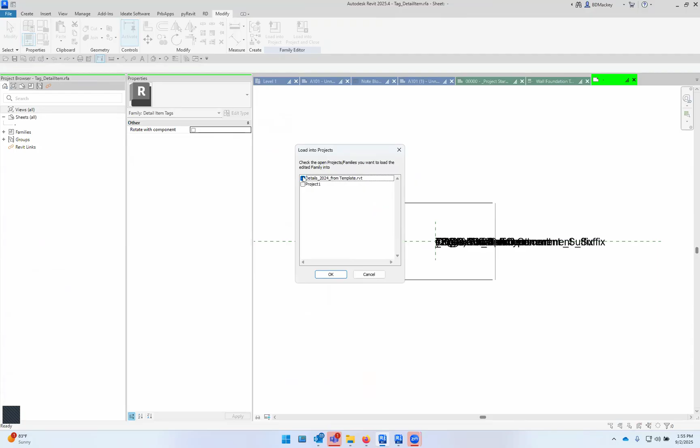So when you add that stupid 1 inch, if I come back here, oh, I didn't reload it. Let me go make that length parameter smaller, then that's where it's going to control it. But no, the control grip doesn't even go to the insertion point of the family. It goes to the bottom of the extent of what it sees within the project, right? So that grip's here now.

And if I edit the type of this and say, no, I only want that to be a 32nd of an inch, now that grip's going to move up to the extents where it sees the text box. So if you have things hidden in your tags and turn them on and off like I do quite a bit, that's just where it's going to be. It goes to the extent, it's not even at the insertion point either. It drives me crazy. My insertion point could literally be in the bottom left corner. Nope, it's the center bottom extent of what it sees in the family.

Sorry, I went on a mini rant once about how we should be able to say, instead of just an insertion point, this is my leader point. This is where the leader should always come from. I don't care where else. Just right here. Don't move it. Beth is like, go vote for this Revit idea: make the text lengths parameterizable. Oh, also, make them selectable.

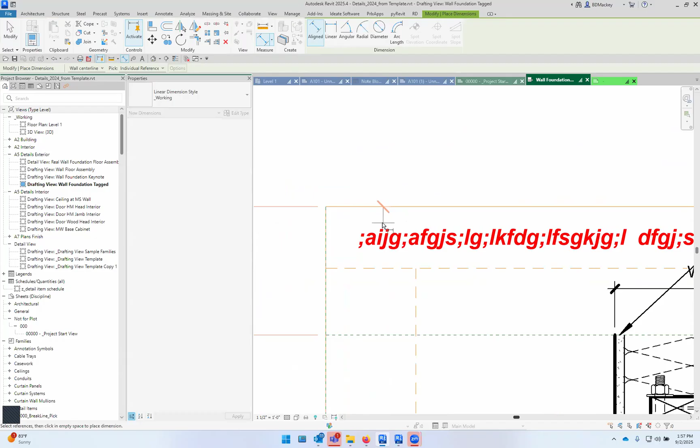Like if I'm in a project and I put a text box in, I really would love to be able to snap or align or grab something other than the stupid move grip. Because I'm OCD. Even though I can align them to the left, align them to the right, when I put a piece of text in, I want this text a given distance from this line. I want it for my OCD. That's it. They should know this about us.

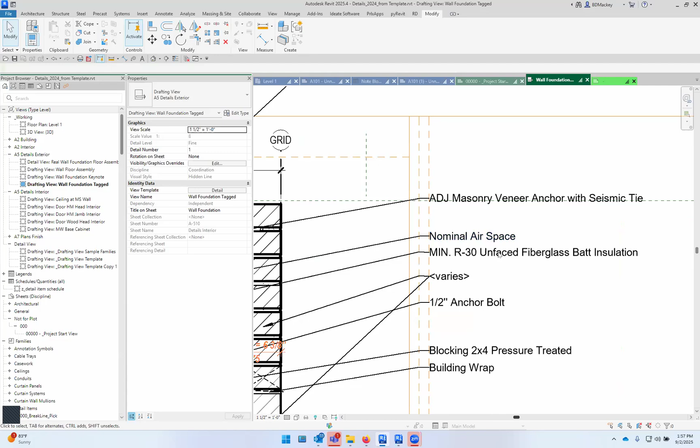And with tags, there's no bring to front, move to back type scenario. Like we said with everything else, it literally goes off of the order you put them in. So when you have those move grips, you can sometimes say, hey, this one's on top of that one. So you sometimes can tell which way you tagged them in the order. Because in Revit, back to the thing I said before, there's still a display or creation order.

All right. I just realized we're at the top of the hour, so we got to buzz through some questions. Yeah, okay. Let's see. I feel bad since we kind of missed Michael's at the top.

When a view is created as a callout, is there a way to change its orientation to match the parent when the parent view is reoriented to an angled scope box? No. So if I come into my views, I'm not going to use a scope box here, but if I grab the rotate command, I can rotate the scope box. I can rotate the crop region. Why did that not rotate? Oh, because I probably had copy turned on.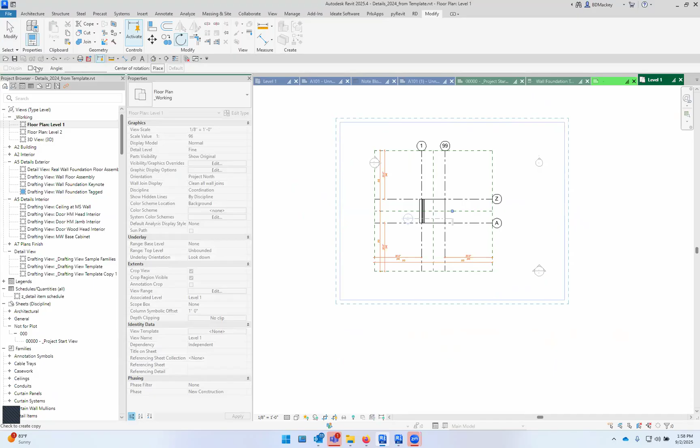God, this drives me crazy. I spent like an hour the other day trying to figure out why this crop region wouldn't rotate, and I realized it was because I had the freaking copy turned on. So if you go to rotate a crop region or a scope box, you cannot have copy turned on. It will not work. I found that out.

So okay, cool. This has been rotated. Now I want to go do a callout of this area. The callout does not automatically rotate. It stays the direction it was. So no, to my knowledge, there is not a way to say, hey, align up with the parent view. I guess I should clarify that too, especially if it's another floor plan. If it's a detail, does that change? No, the detail still stays horizontal too.

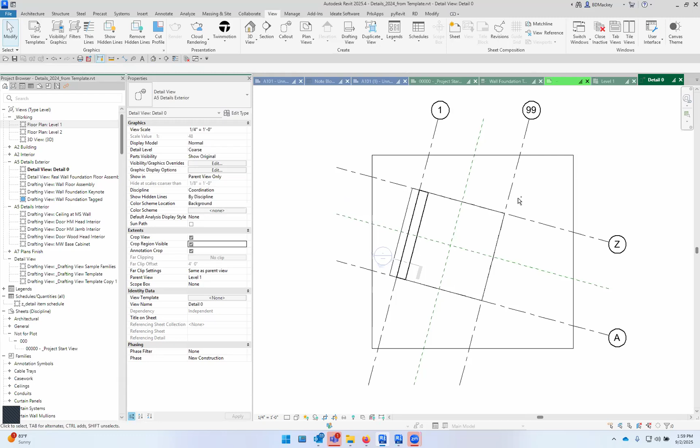So yeah, to my knowledge, you'd have to go rotate, know what the rotation value is and put that in there. And honestly, if I have a building that's got a rotated wing, I have what are called system views. And in my system views, I always put, hey, the building's rotation or this wing's rotation is 8 point blah, blah, blah. So I can just copy and paste that when I need to rotate other things. But no, sorry, Michael.

I'll probably be quick. Is there any setting or talk of one for how far levels, grids, and reference planes extend past the crop by default? Oh, that would be a good one. Yes, there is. And it's the default value for how far your annotation crop region is offset. But the problem is you just can't adjust it to my knowledge. If there was somebody smarter than I who could know how big that annotated crop region snaps outside of there, that would be cool.

But no, it goes to that default 1 inch value, scalable 1 inch obviously. I thought there was a way in the annotated crop you could see the properties of it somewhere. Oh yeah, size crop. So when you look at the annotated crop offset, it's that 1 inch value. I would love to be able to say, go change this to be half an inch and then do create similar and it would pick up on that. I haven't found a way to control that, but it is that default 1 inch value. That's what the annotated crop region is defaulted to.

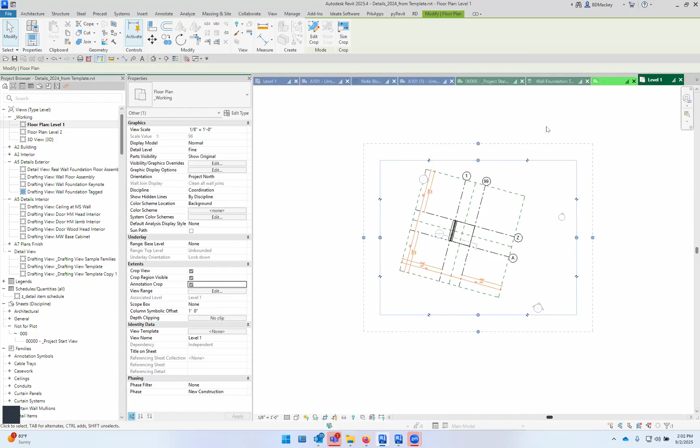So yeah, that's the default 1 inch. I don't know if there's a way to tell Revit to change the default inside of there. I'd love an INI setting for that or something. But yeah, it'd be really nice to have a project setting for default grid offset. Oh, it could be a type property of the grid, in case you needed some. Views have a structural setting for column symbolic offset. I'd love to see grid head offset. That would be amazing. It'd still be per view, but I don't know.

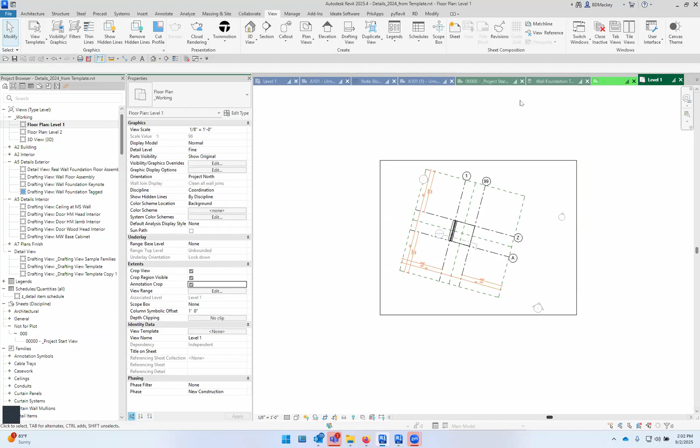All right, what are the last two we got? Caitlin's asking if you can go over the proper steps again on how to get the image from the family in the correct orientation in the properties. In my case it was always showing the back, not the front. Yep. This is kind of what I was talking about here. Part of the reason I'm showing these all rendered is you can see that these rendered images did not depend on the directionality of the sketch lines. Wait, I might have actually rotated that one. But if I recall correctly, they all went the exact same direction. So the rendering image did not depend on directionality, and with this image it's hard to tell because it's all the same image.

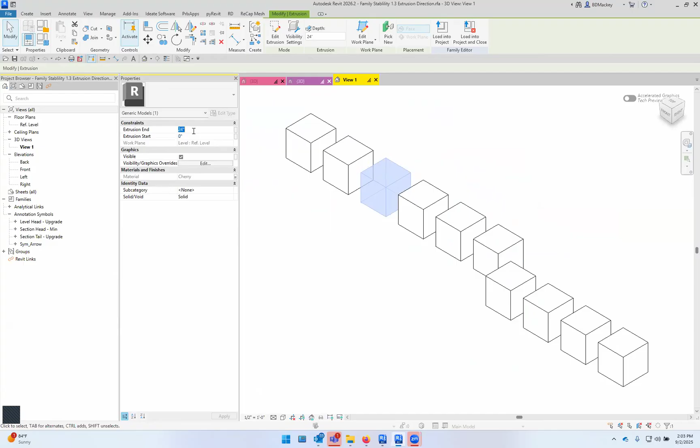But I believe what I had found, quite a few years ago, was that when I had a negative value in my family, oh, that's the wrong family, got to grab one over here. When I had a negative value for the extrusion end, or maybe the extrusion start, one of them is where it came into play. I think it was the extrusion end. So for me, when I'm in a family, do I still have that new family with reference lines created? No. But when I go create a family, oops, here, template, generic model.

So if I'm going to go into a family, and I see people do this quite often, like, hey, cool, I'm going to go create an extrusion, right? And I've got this extrusion and I draw a rectangle here and sweet, finish that extrusion. And when I go into a front view, if I wanted that extrusion to come down from there, like, no, no, no, I didn't want that extrusion to go up. Give this a name real quick. Oops, I click name, you liar.

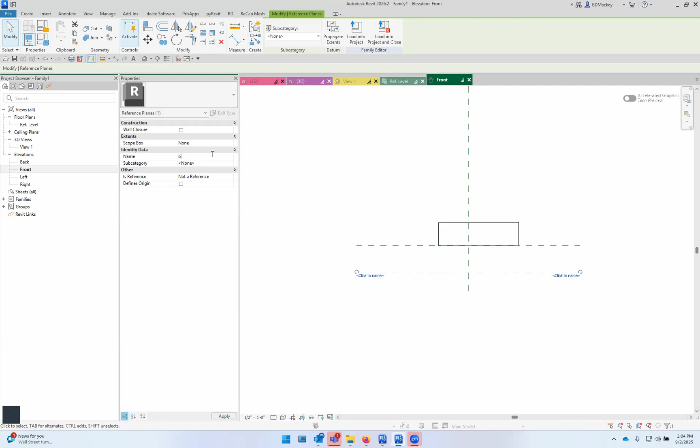Right? Rather than just grabbing this extrusion and doing this and locking it, what I do is I change the work plane. So I edit the work plane of this extrusion to use that B value. Now you'll see that this still extended and went up. It's because of the directionality of that reference plane. If I draw that reference plane this direction, it should have done it. It usually flips it. It did not. That's weird. But it's the directionality of the reference plane.

So if this was going down and I wanted it to go up, I don't ever just take the extrusion and give myself a negative offset. I would change the directionality. I don't know why this isn't working on this one. Maybe I need to be on the right. So if I come into the right, do this, will it flip? It's not flipping. Interesting.

Mirroring, right? No, it's because I originally drew it to the reference level. Let me grab this, and that's called ground plane. So let me go back to the reference level. Let me set the work plane to be ground plane. Draw an extrusion.

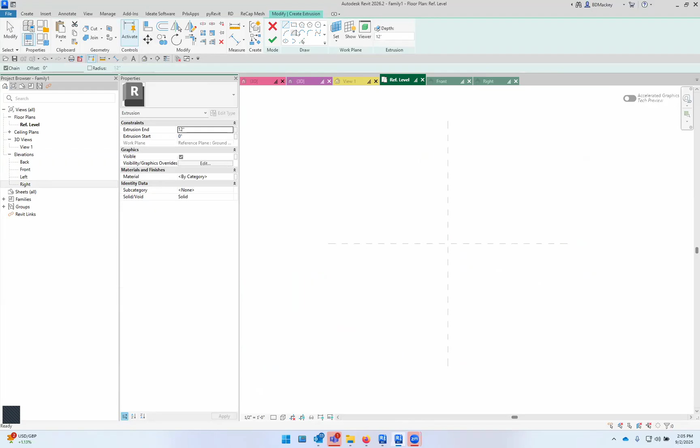I'm just gonna jump in there. I feel like her question was more about the little image in the browser. Right, that's where I'm trying to go to. Oh, okay, because you were here talking about rendery stuff, because that's what she meant, the rendering image, to my knowledge. Did I misinterpret that? I'm not sure. I was thinking it was meaning in the family browser when you're placing it, the little thumbnail, but maybe I'm wrong. I don't know. I thought this was coming from when I said my TV screen was backwards. I'll talk to Melissa's in a second.

If it was my version, I just try to make sure these never have negative values. So I set them to an appropriate work plane, right? Instead of having it up here and going, cool, let me stretch this down, I don't want negative values. I change it so I don't get negative values. I change the work planes, right? Change that from ground plane to be B.

Now you'll see, oh, okay, that extrusion starts at negative 14. I'm going to need to move this one up here, change this back to 0, and now I can align and lock this. That I have found for the rendering images. You usually can change the directionality of the reference plane after you draw it. I'll have to see what's going on with this one. I do it all the time.

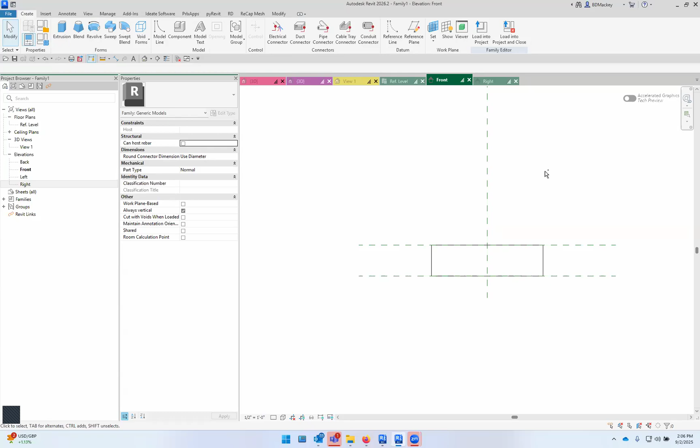But if you were talking in the project browser, how do I get the little views of the families to be correct in project browser when I look at them and be like, cool, what is this clock up here? This is partially how you save the family, but there's also a free tool out there called PIG, Preview Image Generator for Revit.

There's a free and a paid version where you can actually say, go use the Northwest, the Northeast, etc. But it uses your default 3D view, I believe, without tweaking and manipulating it, as long as it's called view one. So I believe that's the case.

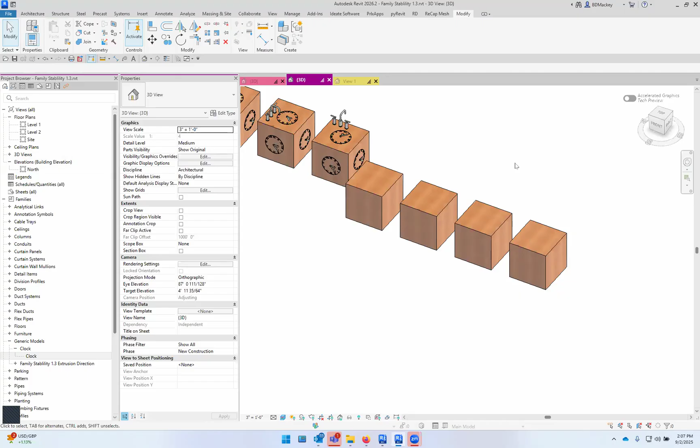Yeah, and CTC has a family preview tool as well. So there's a couple of them out there. If you're like, cool, but I really want to change the way that stuff renders, like I really wanted this image to go the other way within that family.

I personally have a material I call my directional display. I just want to give this a material. It's called cherry. So let me go into my materials and grab that cherry material if it's in here. So what I will always do is with my material, I will go do a surface pattern. The surface pattern has to be a model pattern. Don't care what the model pattern is. I have one called directional display that is just 1 inch parallel lines.

But if you just grab that pattern, you tab select that hatch pattern and you hit rotate, you can actually, are you not letting me rotate? Tab, rotate. Oh, that's right, because I'm in 26 now. I want the angle up here to be, why can't I just say angle? I haven't played with this new rotate. Oh, I don't want to place it. Just be centered. That's fine. And then say I wanted this to be rotated at 45 degrees.

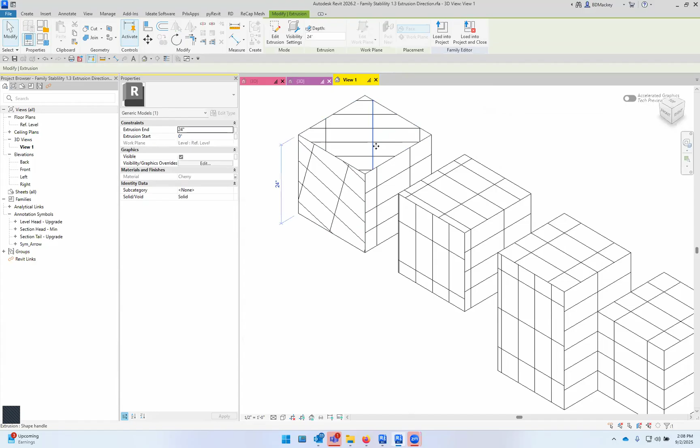If you do that, and then you can even tab, select this intersection, move it to the corner, whatever. If you do that and then load that back into the project, that will actually rotate your rendering image as well. So which one did I do up here? You can see that can happen.

So for me on my door library and a lot of my things like that, when I go into my leafs, my leafs are never one giant extrusion. This one? No. Is it this one I do? Yeah. So my leafs, I don't ever do as a giant extrusion. This is one extrusion, this is an extrusion, this is an extrusion, because I rotate all of those rendering hatch patterns. So if somebody does come back and say, I want that to be wood, I truly get the cross grain wood here, the vertical grain here. And again, my type A personality, I even rotate the hatch patterns on end grain, so it's going the correct way.

So yes, if you're talking rendering images, the rotation can work as well, but I've never tried the mirrored out version of that. It's because you're on a negative side. I've never tried to mirror a hatch pattern, so I don't know if that could be the case too. All right, what's the next one?

Oh, we've got a question on why you're not using the accelerated graphics tech preview. Oh, because I'm not in a project big enough to determine it. I love this tool. I actually went to Inside the Factory with Melissa's coworker Aaron, and he's like, "Dude, this is scary fast." He called it uncomfortably fast because you're in some of these projects, and it's just so fast. I was in an airport that in Revit 25, you'd go to spin the model, and you would wait 30 seconds.

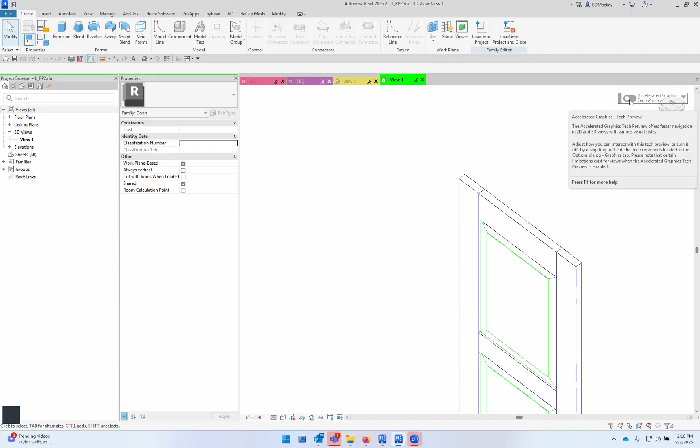I was able to actually be in that actual project. I went to the steering wheel, I grabbed the look tool, and I was able to use the look and then the arrow keys, if you've never done this, and start walking through the airport. My arrow keys are currently not working. They'll let me go sideways, but not up and down. But I was able to do this through a camera view and walk through this airport in Revit as long as that was turned on. It was insane. Like Aaron said, it was uncomfortably fast.

Well, the reason I'm not using it here is I don't have a file big enough to make it worth my while. But yeah, I love that tool. I've been trying to tell everybody they need to upgrade to 26 just due to that tool. And 26.2 even updated it more. So it's now not ignoring, I believe, the crop region. So I think it's actually still using crop region in 26.2. But yeah.

Cool. I see we got one last question from Joseph.

Yes. Okay, so Joseph has been working on building a Dynamo script to check the model location, project base, survey, and internal for the model that you're in, as well as the links to make sure they're in the right spot. What I found is that Revit will report it's at 0,0,0, except it's really at negative 4.6566128, etc. So at what point does rounding for locating projects not matter? I'm thinking maybe 5 or so decimals. I'm looking to coordinate 7 models all linked together. Doing it one by one and the links overlap is not easy.